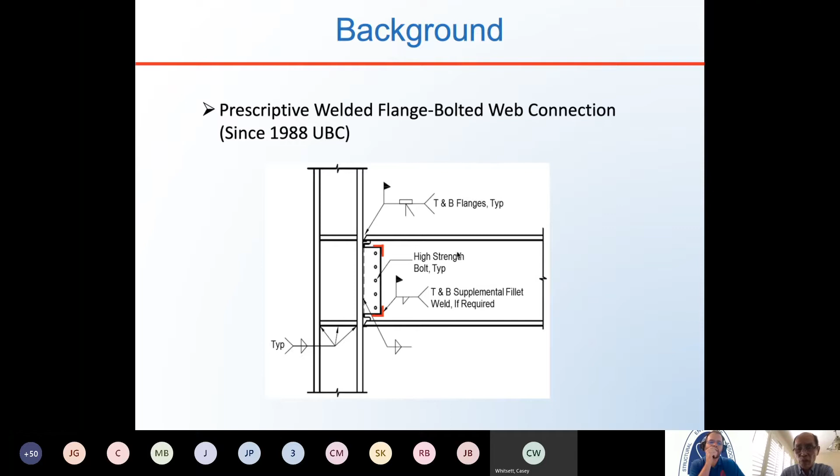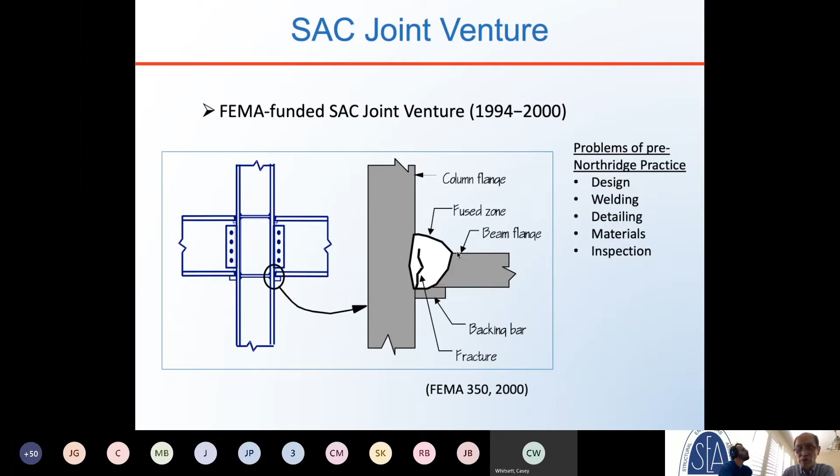The background of this document all started from the Northridge earthquake. In the old days, we used this kind of connection, the bolted web, welded flange, that was codified in 1988 UBC. We know the problem that we saw in the Northridge earthquake—because of that event, there was 5-6 years of research done by the SAC joint venture that we old-timers are very aware of. The problem was pretty widespread: a design issue, welding issue, detailing issue, everything. It's very hard to pinpoint who is responsible for the brittle fracture observed from that earthquake.

So in that joint venture, there are many issues that have been addressed.

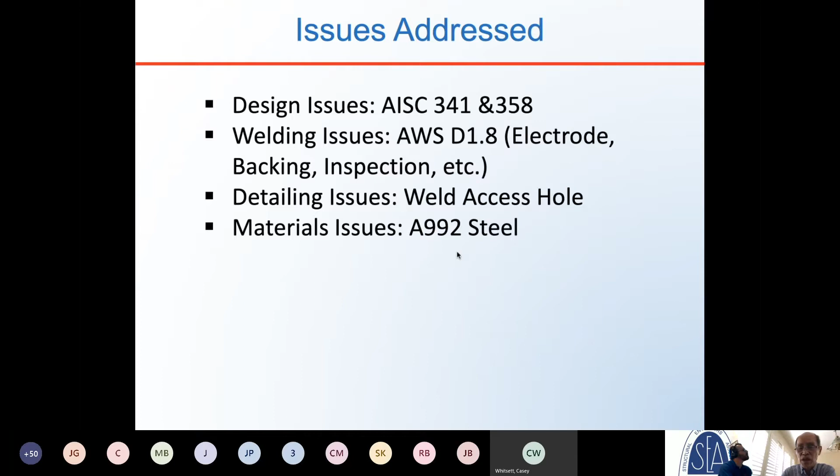As a result of that 5 years research, we have a new material, A992 steel, and the welding code AWS D1.8 to address seismic issues, not to mention the detailing and design issues that you, the design engineers, have to deal with all the time.

So after SAC, we then have the AISC. During that transition period, we also transitioned from UBC to IBC, ASCE 7, and other than using UBC, we also have AISC 341 for seismic design of steel structures.

For that 2005 edition, for the special moment frame design, the moment connections, there's a performance criteria described there. You want to make sure the connection you use will have a deformation capacity up to 4% story drift angle, while the strength cannot degrade below 80% of the beam plastic moment at the face of the column.

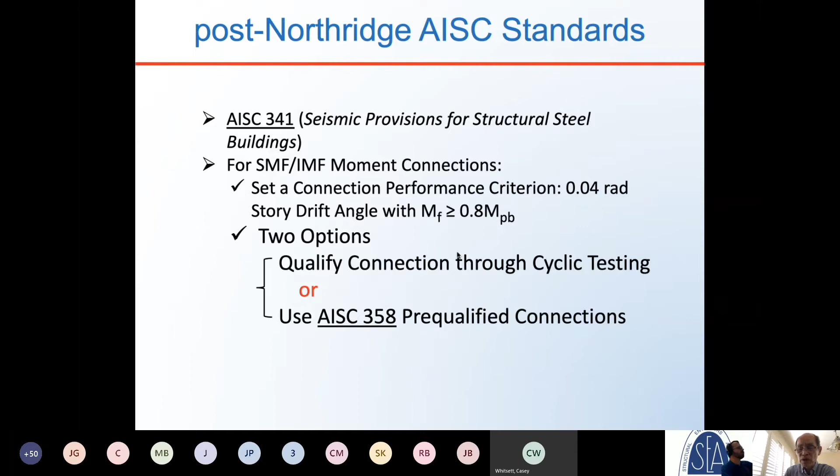341 then continues to say that you, the engineer, has two options: you either ask your client to give you money to do testing to justify your connection, or you use AISC 358 for the connections that are qualified there.

358 is developed by a panel we call the CPRP. The current chair is Professor Michael Engelhardt, Vice Chair Brent Manning from Schuff Steel. If you have any question, you can contact them, or Margaret, who is the Secretary of CPRP now. Their job is to develop this document and to qualify connections for this standard.

That's how they started immediately after the Northridge earthquake. Can we tweak the existing UBC connection by changing the detail or by using better electrode? Can we do a better job? So there's a so-called unreinforced connection. They try different kinds of things.

And they also tried the reinforced connection. For example, the cover plate was tried early on, while they try to figure out the solution we call the reinforced connection.

Then we realize strengthening it may not be the only way. So we also try the reduced beam section, and there are other types of connections. So they digest and then go to the next page.

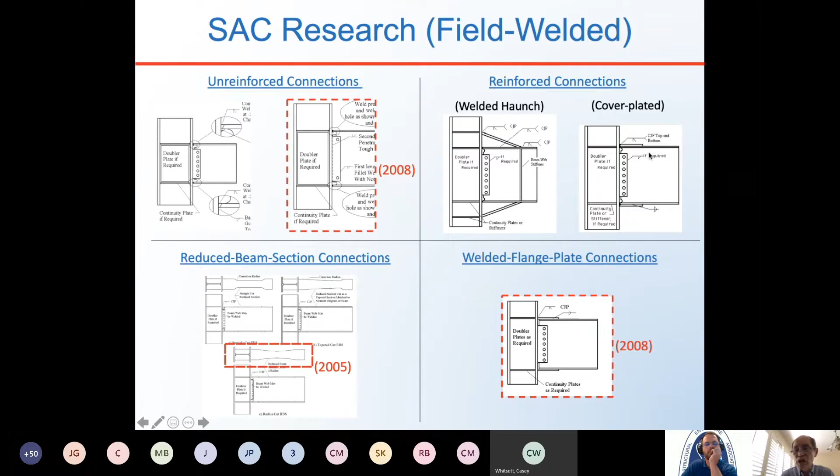And there's a flange plate that, again, some connections have been incorporated. This is out, cover plate is out. The haunch is not included in the 358.

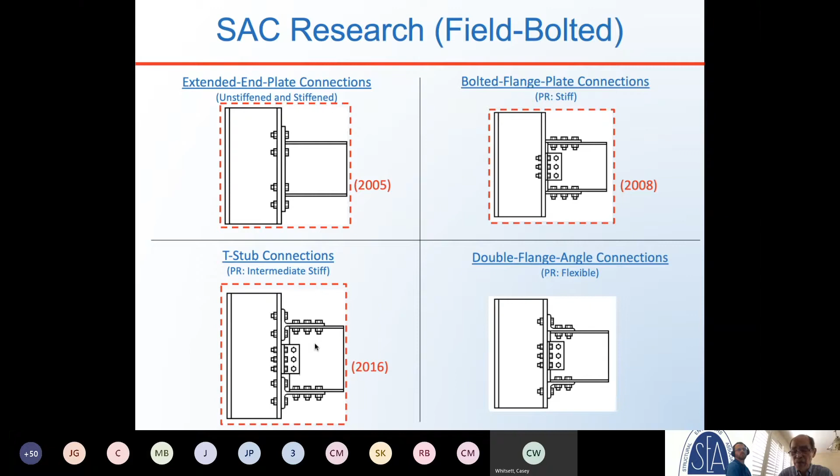And similar for the bolted one - this was incorporated in 2005. I will mention more later on. 2008, 2016, you see, this one takes a long time for the CPRP to digest for inclusion in the 358. And this one probably will not show up.

The history: first edition 2005. Supplement 1, 2008 - at that time there were only 2 connections pre-qualified, after they filtered the connections from the SAC report. Then they added 3 more years later.

Then came the 2010 edition - it was 5, then supplement 1, 1 more, and supplement 2, another 1. So we have 7 now.

The 2016 edition, the one that you use now, 2 added making 9. Supplement 1, another 1 in. And end of July, you should see this, and I will also touch upon briefly.

This is what we have. CPRP continues to work on the 2022 edition, so they will have a few more connections to come. That is the history of 358.

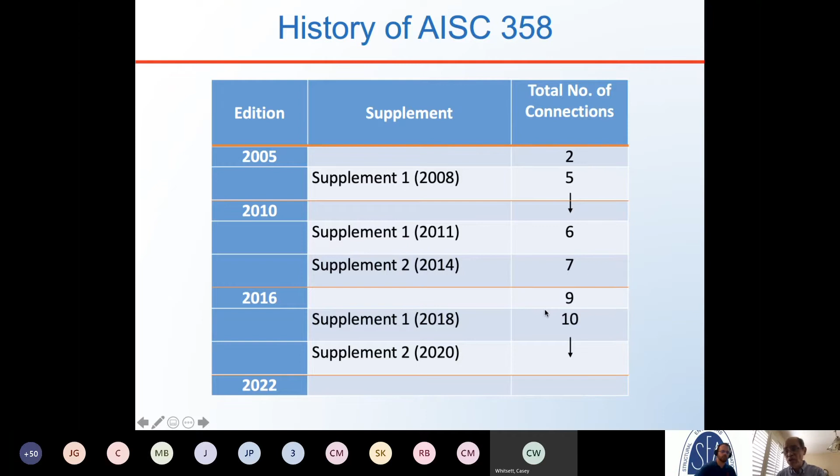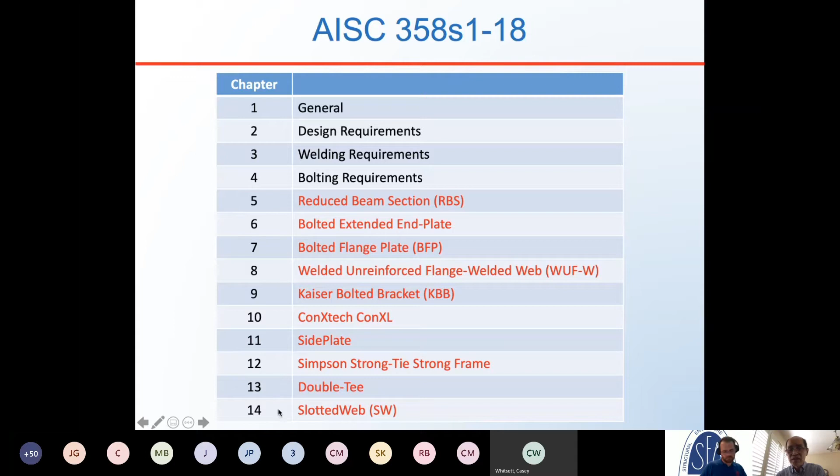So this is Supplement 1 that you have now in 2018. There are 14 chapters: some general requirements, design, welding or bolting requirements. Here are the pre-qualified connections - we have a total of 10 so far. I'll talk about them in a moment. You might ask, why do you need 3 or 4 hours for me to talk about 358? Because I think if you have a general idea of this document, you should be able to figure out whatever connection you want to try. So my presentation today is to provide a general picture of this document.

I will take one particular chapter, RBS, which probably all of us are familiar with. I'll use that as an example. This is the outline of that chapter. Every connection chapter is outlined in a similar manner. The first part is the preamble, which tells you what this is and where the structural systems you want to use are. That's the preamble - some general description of how it looks.

Then I group this as Part 1: qualification limits - the beam-column limitation, I will talk about that. That is true for every connection - you always see the limit. You want to see whether that connection will be good for you, so you look at that.

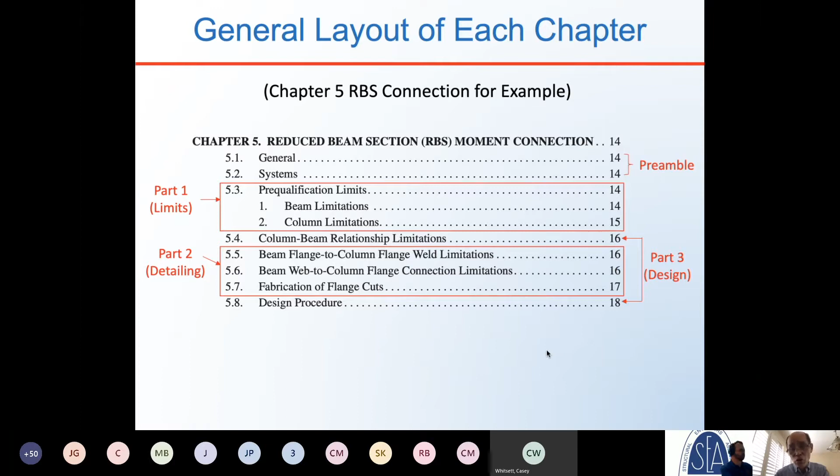If you're familiar with chapter 5 and you want to look at another connection like WUF-W, you go there. It's probably not hard. Now let me, rather than talking about one connection at a time, give you an overview of what you have.

Some engineers told me, saying, I need to know more about 358 because my design office only uses RBS, and there are so many other connections in this big document - I really don't know, I need your help. So here I try to summarize for you, an easy to understand figure.

The first one is the beam depth. Beam size is very important for moment connection performance. The reason why we had weld fracture, CJP weld fracture in the Northridge earthquake is because the beam tried to form a plastic hinge, tried to develop plastic moment. It put a tremendous amount of load on the CJP weld. So the weld force demand is coming from the beam - that's why beam size is very important.

There's another thing many of us know: there is a beam size effect. That means if I use a small beam for testing to qualify a connection, I cannot generalize that to a deeper beam. That is one lesson we learned from the Northridge earthquake. In the old days, we tested W18 beams, then engineers used that for W36, and there was a problem.

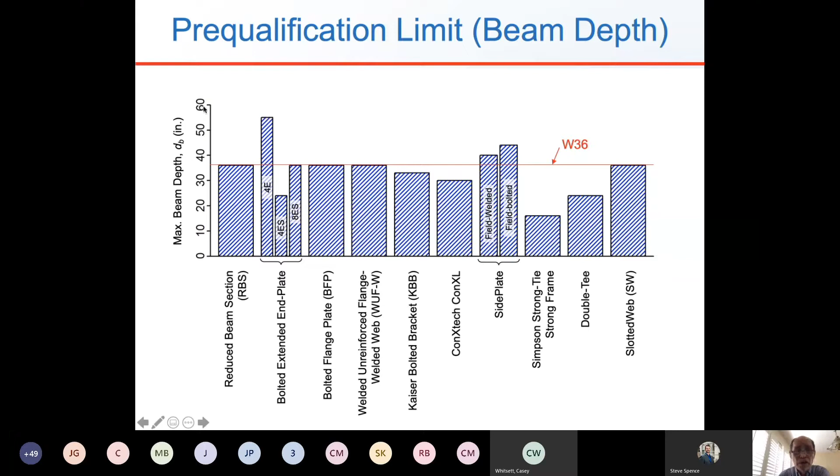But this one stands out - actually this can go to 55 inches in depth. You say, there's no such rolled shape - yes, that is mainly for built-up sections. I'll talk more about that. So beam weight is also important - the heavier the beam, the larger the size, the heavier the beam will be.

Look at this bolted end plate. It's built up, for metal building. You can see it's very, very light. Even though you see the 55 inches deep, actually it's a very light member. This is a very different animal. Unless you are in the metal building industry, usually you don't see this connection.

Now look at the beam weight. I use RBS, the well-known one, as a reference. It can go to 300 pounds - they are pretty light. So in case you want to use a heavy beam, probably they may not help you too much, so you may have to resort to some proprietary connection. Side plate can go beyond what the 300 pound can do, so you can see that they provide a much heavier beam for you.

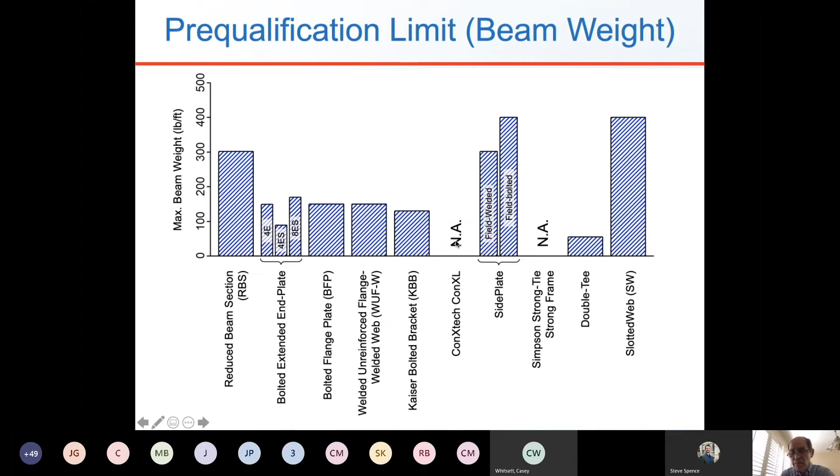And the other one is the slotted web, it's also on the heavy side. Those are very light duty ones. Here they are not available because they're tabulated somehow, so it's not unlike the other one, they put a number. That's the reason why that is implicitly limited by some other means - for example, in the tables.

Another limit is the beam flange thickness. Just imagine you have a roll shape, the flange width is 12 inches, and the beam flange is pulling your CJP weld. So of course the amount of force that the beam flange is pulling on that CJP weld is also a function of thickness. So thickness also plays an important role.

Look at RBS, 1 3/4 inch - so you get the feeling, huh? 1 3/4 inch, others are thin. And this is for metal building, you see it's very thin. Usually it's a build-up member, so it's pretty thin. So that is regarding the beam flange thickness, and sometimes there's no limit for some connections.

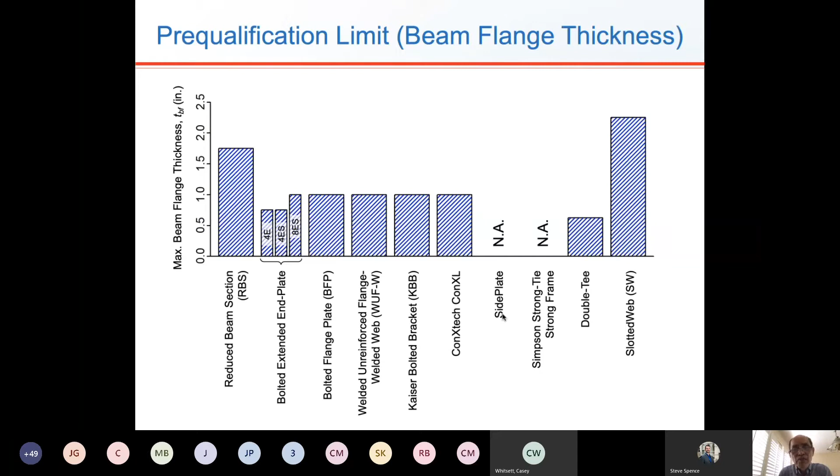So you, the designer, you like to see - you like the previous slide - you like it to be as large as possible so you can use a larger beam. So maximum, we always say maximum depth or maximum flange thickness. Now there's another one, it's not the maximum, it's called the minimum.

For each connection it also tells you, this is the one, you cannot go below this, right? For the beam depth, you cannot go beyond that. But for this ratio, you cannot go below this.

Why? Just imagine you have a beam. If you develop plastic hinges at both ends, you draw the moment diagram - there's a reverse curvature, right? So the slope of the moment diagram is shear. If that beam is shorter, while you develop plastic moment at both ends, of course the slope is larger - that means shear is larger, so that means the connection will see a larger shear force.

What does it mean to you as a designer? If I, in the laboratory, test a moment connection for a span of 30 feet, I qualify the connection. You should not use that blindly for your structure with a 20 foot span, because the connection will see a much larger shear. That's the reason why there's a limit.

This is the clear span, LC, clear span with respect to the beam depth. Again, use RBS as a reference line, around 7. So in this case, probably the lower the better, right? Because I say minimum, so the higher - that means your span relatively cannot be too short. So the smaller, the better.

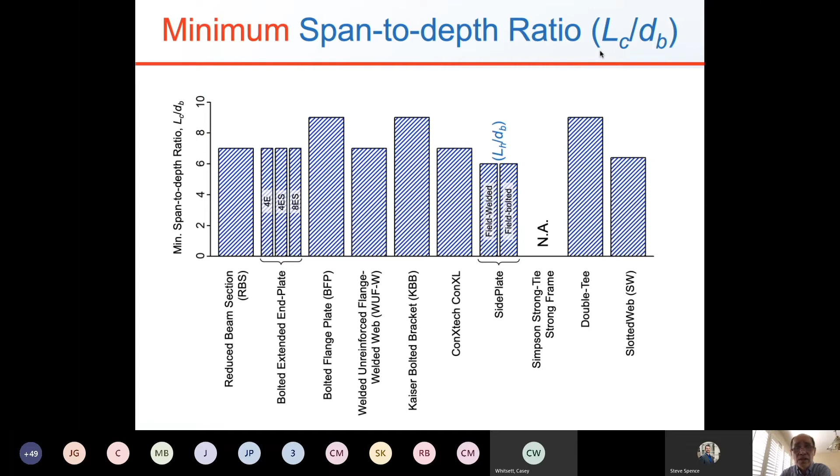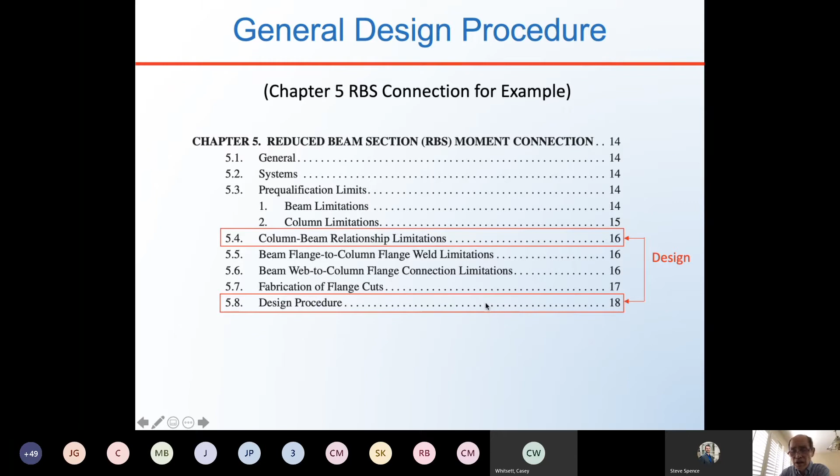Now let's touch upon briefly the design procedure that you are all very familiar with. I want to go over this quickly, and I say you don't need me to give you 3 or 4 hours of a short course to talk about how to design every connection. The concept is the same for every connection. It's the same. Okay, this is the frame, we want to define plastic hinges.

And I will talk about the location of the plastic hinge later on. You know the plastic hinge. Of course, you follow AISC, you have the seismic load combination with overstrength because we're doing capacity design. So I take one beam out - this is one beam out. Once you know the plastic hinge, then we try to find out what is the maximum probable moment. We want to find out what it is. You know how to do that for RBS. We find out this, and then for the seismic moment, this is a straight line.

It's a straight line, then I extrapolate the moment to the column. That becomes a demand for me to check strong column weak beam, panel zone, and the requirement for continuity plate. So I just extrapolate. This is the Emh per ASCE 7.

This concept is so simple. All you need to know is where's the hinge for the connection you are using and how to compute these. That's it. Then everything else stays the same. It's the same design philosophy.

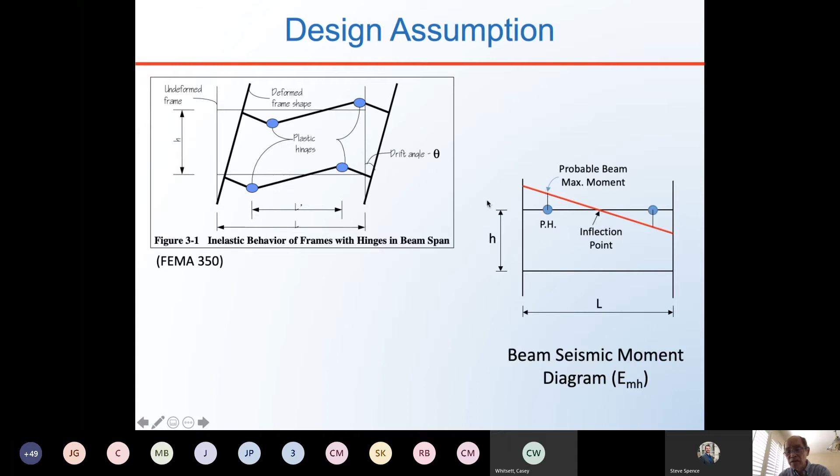How come I cannot move?

Okay, RBS, right? RBS, half of the beam span, center line. You all know this. Inflection point, we assume it at beam mid-span. So plastic hinge, SH is in the middle of this RBS. So I compute this. Of course, here I have a reduced section. I use ZRBS, and here for A992 steel, 1.15.

Okay, then you extrapolate to the moment there. You extrapolate for the panel zone shear check and the continuity plate check. You extrapolate to there for the strong column weak beam check. This is seismic moment. You just add that to the gravity load component, which is not hard at all.

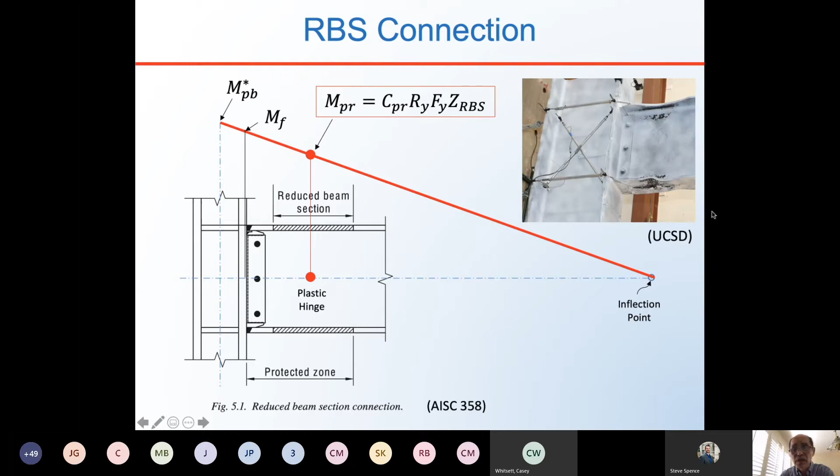RBS, okay, this is a testing we did. You can see that is a plastic hinge, which is reasonable.

But in document 358, in that particular chapter, it tells you where's the plastic hinge. It's here. It's described in that chapter. So use that one, then you compute the moment.

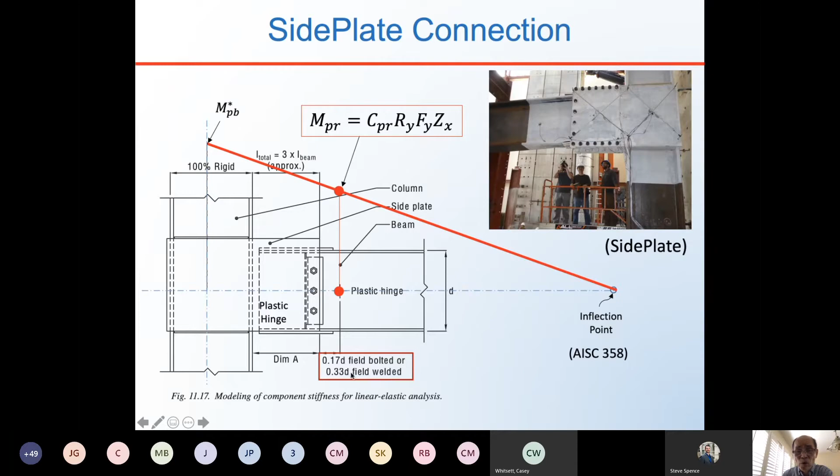Of course, here you don't use RBS because side plate beam does not use RBS. So you use the complete ZX of the beam. Then you do extrapolation. It's the same thing, right? So that is, you can see the hinge is around there, which is compatible to what is proposed by side plate and used in their design.

Okay, so good. Let's go over one connection at a time. Okay, one at a time.

Chapter 5, RBS, the first one introduced. One of the first two connections prequalified. This is the one that you use quite often.

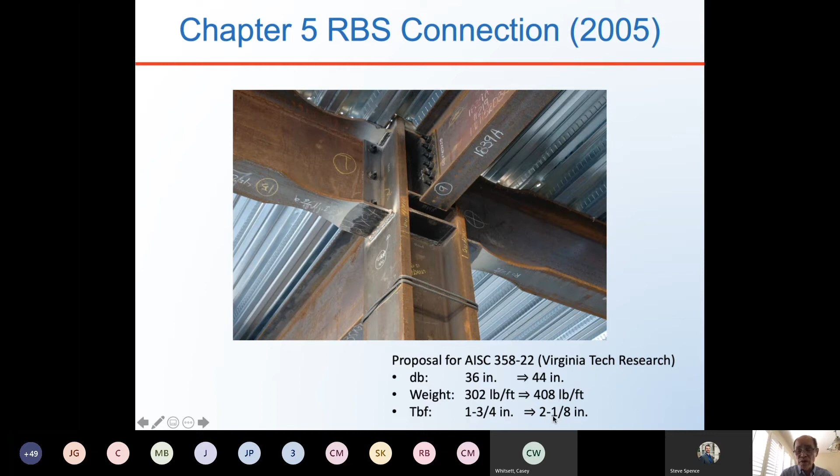Recently, there's a proposal for the 22 edition based on some testing at Virginia Tech. The first ballot has been passed, I believe, by the CPRP. The proposal is to extend the beam depth to 44 inches. The weight will go to 400 pounds. And the thickness of the flange is also increased. Just be aware of that. That is likely to be incorporated in the 22 edition.

That is chapter 5 on RBS. Chapter 6 is extended end plate connection. As I mentioned, it's mainly used for built-up members, and the metal building industry uses that a lot. This is the 4-bolt, but it is stiffened, and this is an 8-bolt.

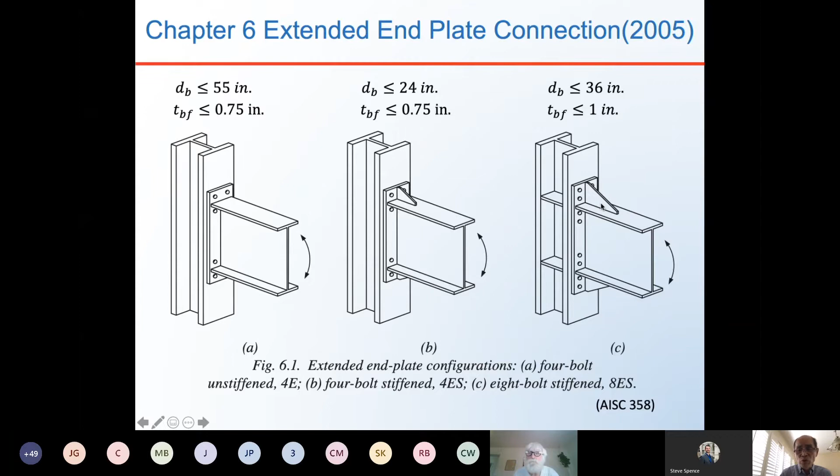So those are prequalified. Recent effort at Virginia Tech also tried to develop a 12-bolt, but not successful. So they're still trying to figure out how to make that work. They tried to have that included in supplement 2 to be released this year, but they encountered some difficulty. So this one has not been successful. And this is the type of connection.

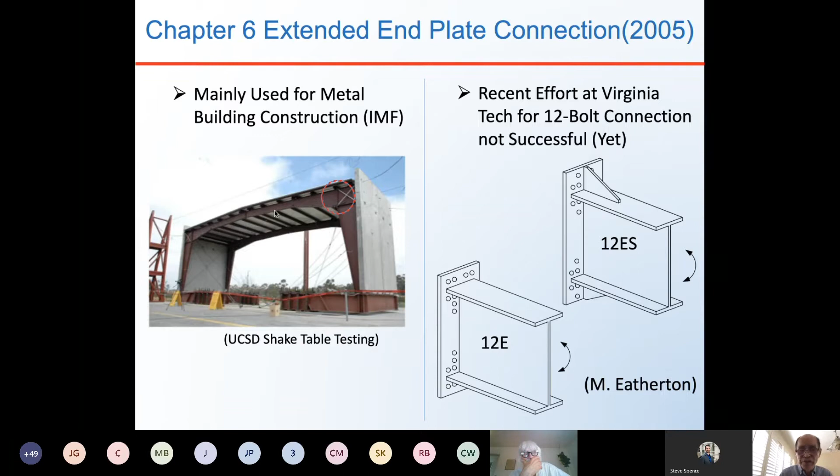Okay, I happen to have some experience with one of the shaking table testing of the metal building that I tested about almost 10 years ago. They use this kind of connection for IMF in high seismic regions.

Whenever bolts are in shear, you should expect noise, pretty loud noise, okay, which is pretty typical. This is the first connection test I did with the bolted connection that has a lot of noise because they are pretension bolts and they will slip.

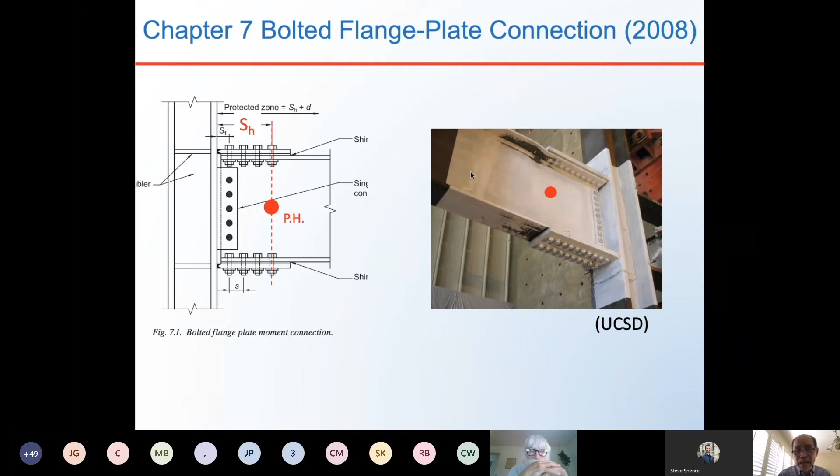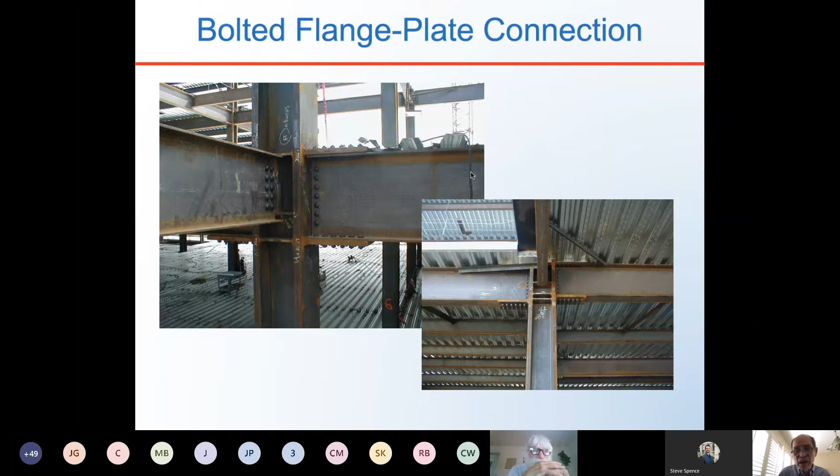I don't see too many applications of a bolted flange plate connection. This is one that I'm aware of. Somebody can provide a photo to me. This may be on UCSD campus.

Okay, but other than that, I have not seen this type of construction. Go to next one, WUF-W. It's more commonly used. This one is closer to the pre-Northridge. But the one problem with pre-Northridge is, among many issues, the web is bolted.

So for the WUF-W, with all the improvements, remove steel backing and those kind of things, there's an enlarged shear tab, and that needs to be welded. And the beam web also needs to be CJP welded. In addition, there's a special enlarged weld access hole that is in D1.8. That weld access hole needs to be used.

And there's a special reason to have this weld access hole. Because making this longer, one problem with the pre-Northridge is we've put a lot of bolts to resist shear. But in reality, bolt web is not very effective.

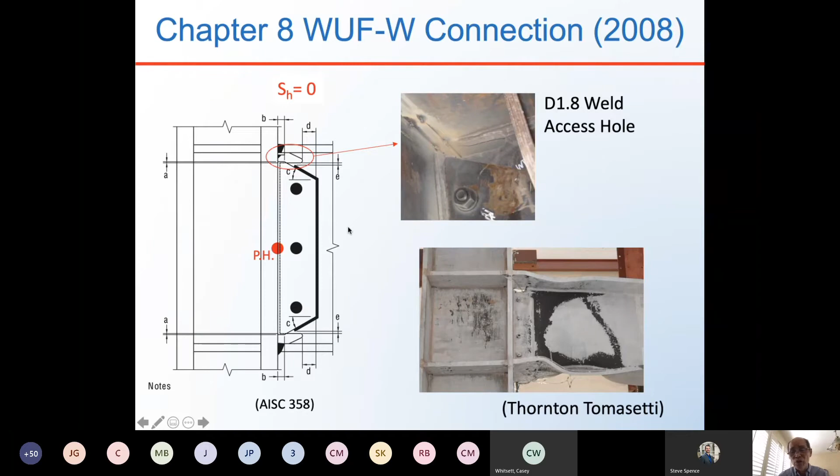That is WUF-W. This is one application, WUF-W, from one company in Pasadena. WUF-W. This is another one from one of my former students who showed me this photo. This is for a bigger building, this is for one story, for a police station. So you can see that it remains to be welded. Keep in mind that the weld access hole is very, very important.

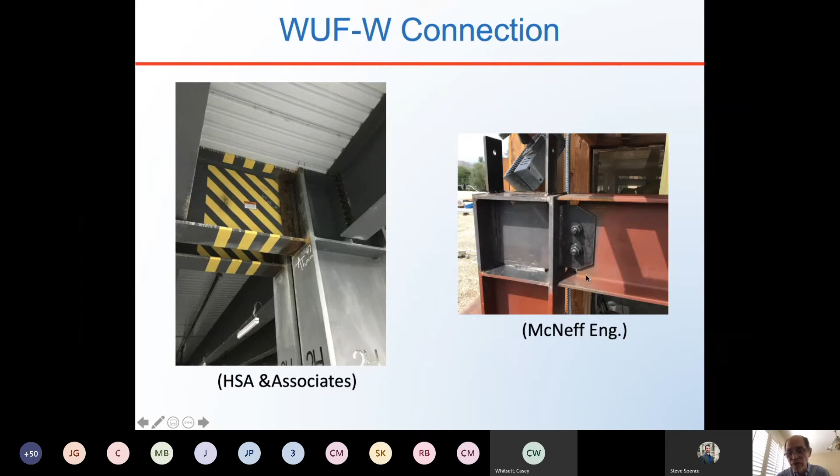Weld access hole. Since I'm talking about the beam shear, let me jump to the last chapter because it's relevant to what I just described about the WUF-W. So let me jump to the last chapter, the slotted web that was introduced in 2018.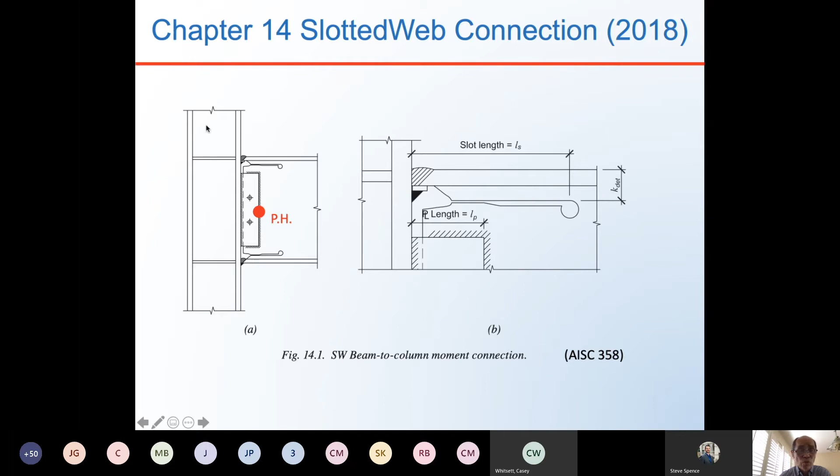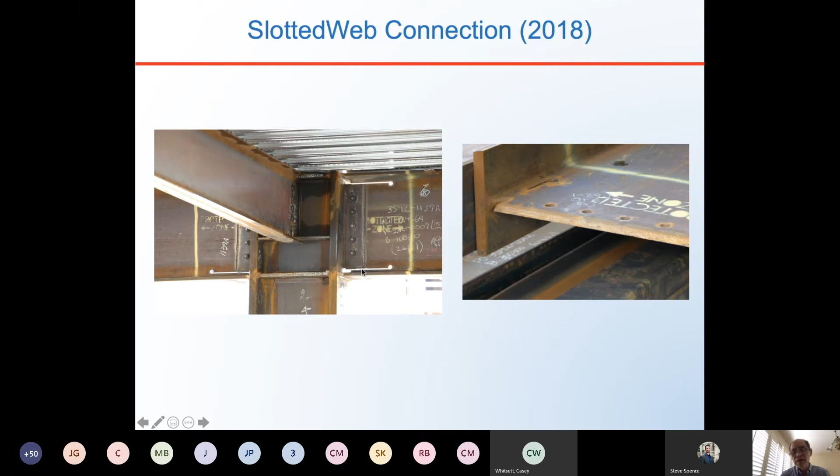I suspect once they welded that one, then they flame cut this portion to create this. This is a little, the edge is a little rough, but it's okay. I think it's not as critical as RBS. The smoothness is very important.

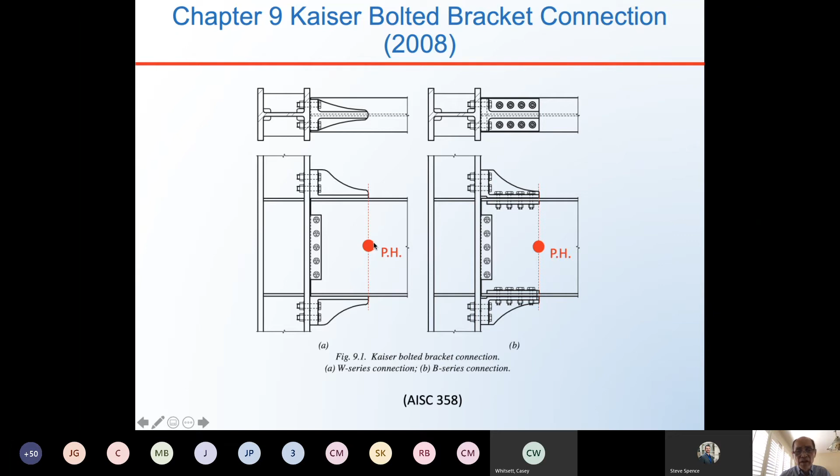Chapter 9, Kaiser bolted bracket. There's a welded version and a bolted version. I don't see a real construction in San Diego. The plastic hinge is assumed to be here in design.

I have two experiences with the Kaiser bolted bracket in the lab. This was when I was working with a technical engineer on the retrofit of a Caltrans district office in Oakland. This was one of the options they contemplated, but eventually they did not use it.

This is good for retrofit. You just imagine, of course, you have to drill a hole to the flange of the beam and the column, but no field welding in an existing building. Fire hazard is a concern, so this is attractive from that point of view.

This is the detail, you can see the connection detail. Another project I was involved with was for a police station, again in the Bay Area. They also used the bolted bracket.

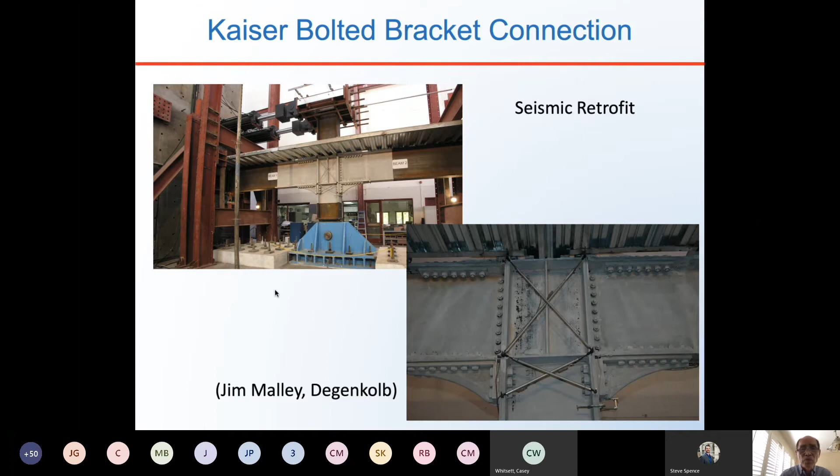Compared to the other connection, there are two aspects I can think of. First, it's biaxial. Most SMF designs are 2D frames, not 3D, but this is a true 3D frame. Second, it uses a 16-inch HSS, and the concrete can be filled to further increase the stiffness and strength of the connection.

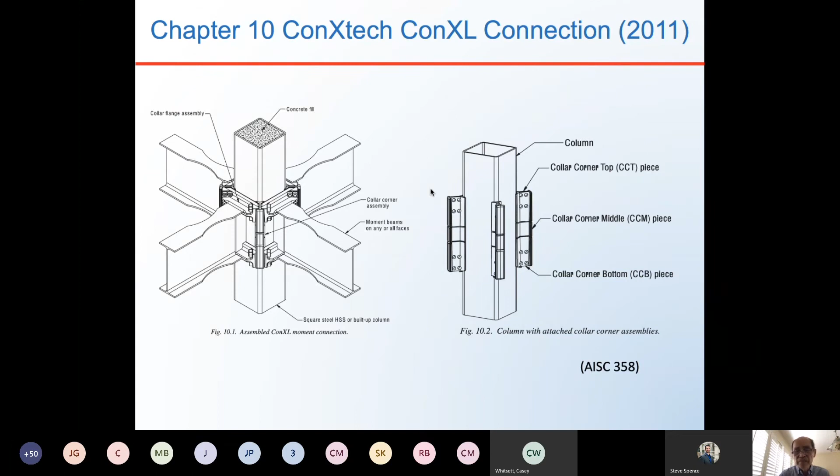I happened to see one building under construction last year near the junction of 163 and 52. I don't know who the designer is, but I happened to see it, so with permission I got in and took a few photos. This is what the connection looks like.

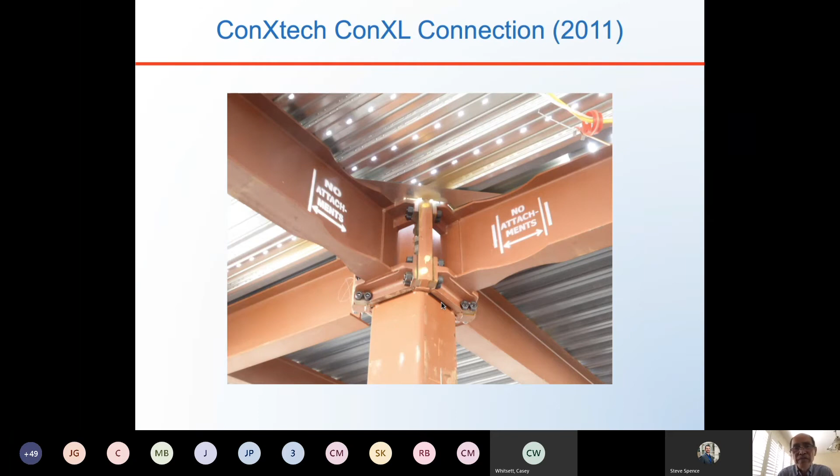That was introduced in 2011. Chapter 11 is the side plate connection. It was introduced relatively late, six years ago, but the side plate connection might be the first proprietary connection.

I started doing testing for the founder, David Houghton, in December 1994. I still remember, it was a very cold day. We were doing testing for them.

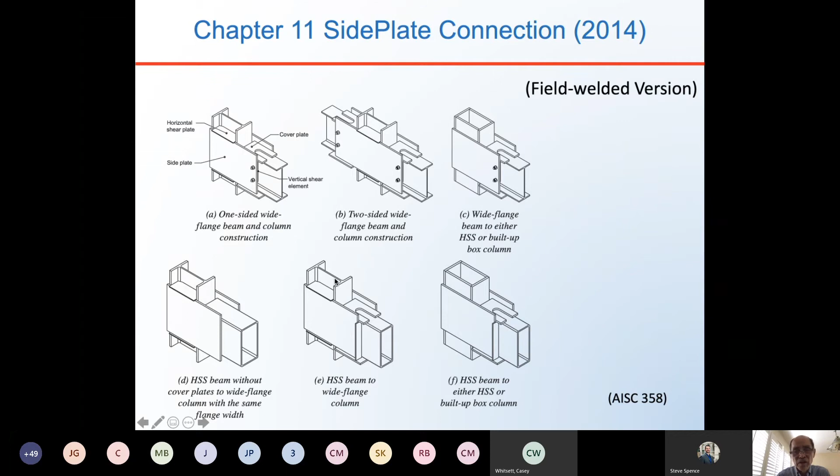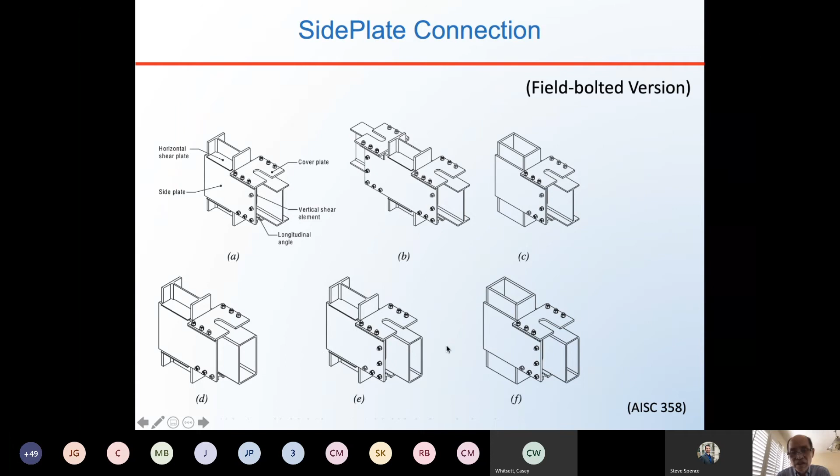And then a few years ago, they started the field-bolted version, so you see here. Of all the connections I tested for side plate, the beams are always rolled shape or built-up. Their connections are also qualified for HSS, which were tested elsewhere, not at UCSD.

They also, over the past 20 years, have conducted several biaxial moment connection tests at UCSD. They started out with this dual strong-axis connection, with the W shape and the structural T cruciform, like this one. This is the biaxial connection.

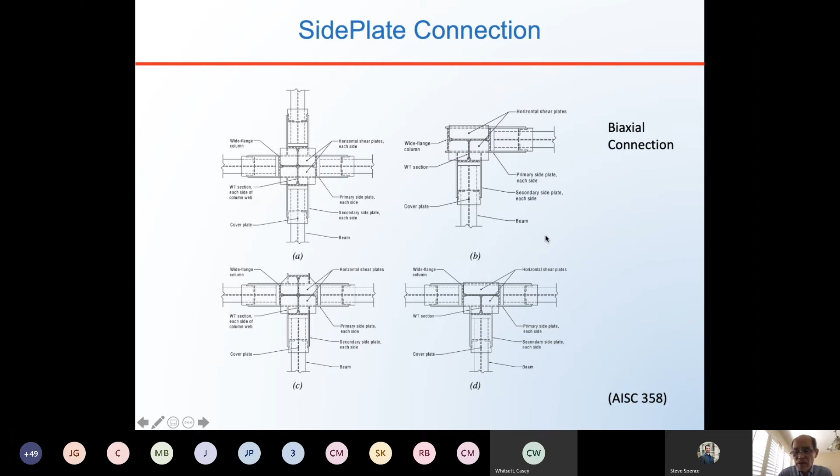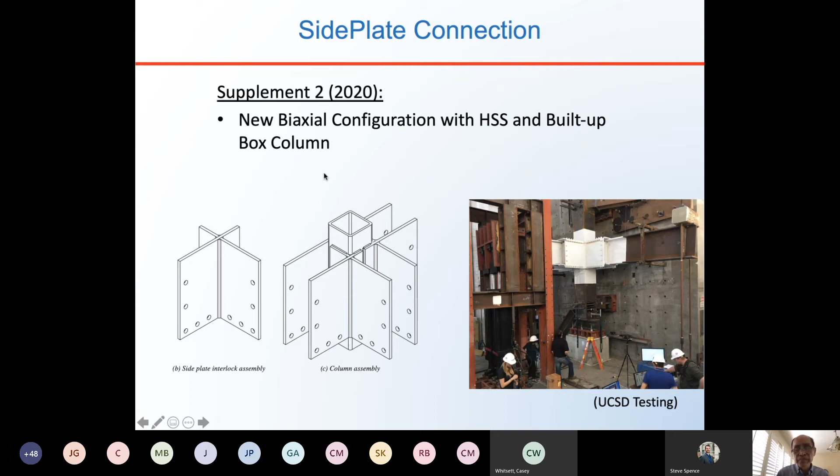They have also pre-qualified that one. In Supplement 2, likely to be released by the end of next month, they also pre-qualify the HSS or built-up box columns. This is the built-up box column testing that we did for them about two or three years ago, so that is another addition.

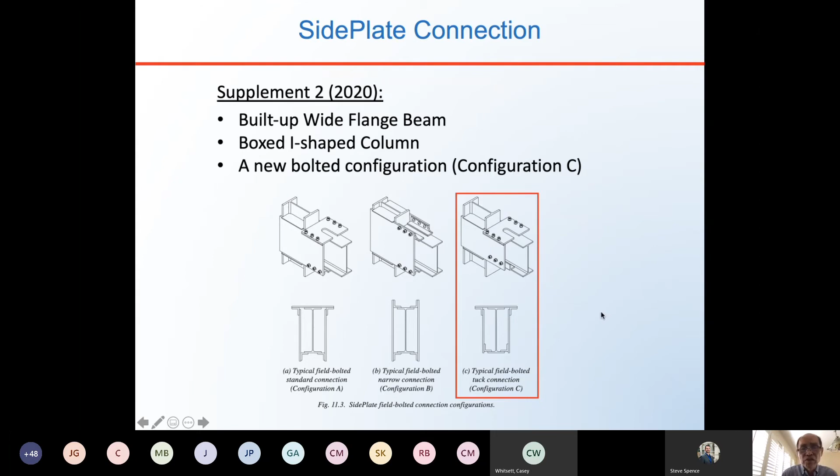In Supplement 2, just to keep you updated, there are many choices you can have. Another one they introduced is so-called Configuration C. In the original configuration, the angle points down, now it points this way. My understanding is it's mainly for hospital applications. So those are the new features to be added.

Let's go to chapter 12, Simpson Strong-Tie, which is also a latecomer, introduced in 2016. This connection is interesting—it's a PR connection, not an FR, fully restrained connection. It's a PR connection, that's one thing to be noted.

The idea with most connections is we rely on beam hinging. That means after the earthquake, the beam will be damaged in a nice way, so to speak—though we don't want brittle fracture, that's what we expect to see.

For this connection, they want the beam to remain elastic, and then they put in a fuse. It's a structural T there, can you imagine that? This is a fuse, they want that to yield.

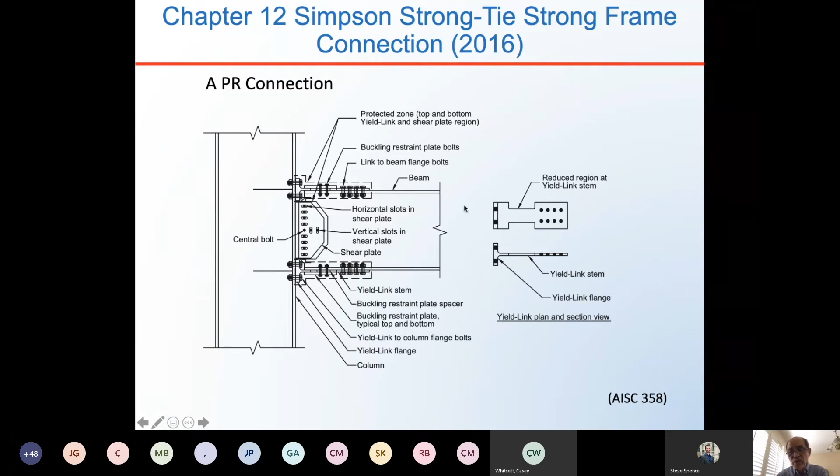And there's a buckling restraint plate on top of it. This is a better view. They want this just like the tensile coupon—they want it to yield in tension and compression.

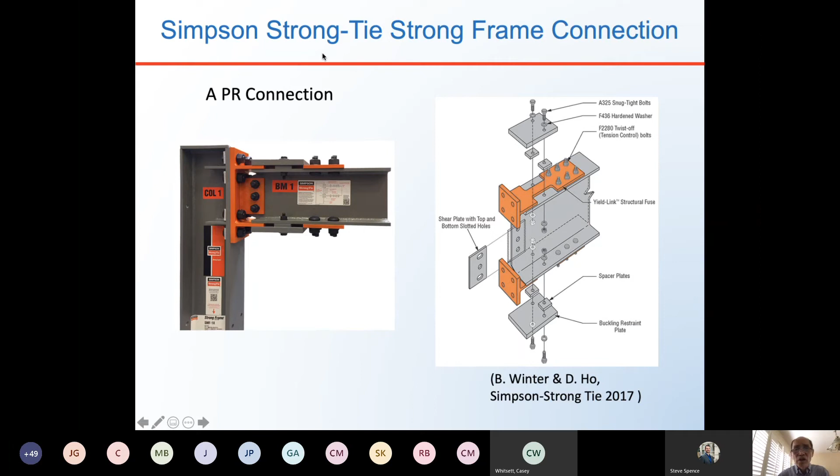Do you see that plate in orange color? The middle portion that you don't see is the narrow portion that will yield, but in compression it will buckle. So just like the BRB, they put a plate to prevent it from buckling. That is the basic idea of this, the strong frame connection.

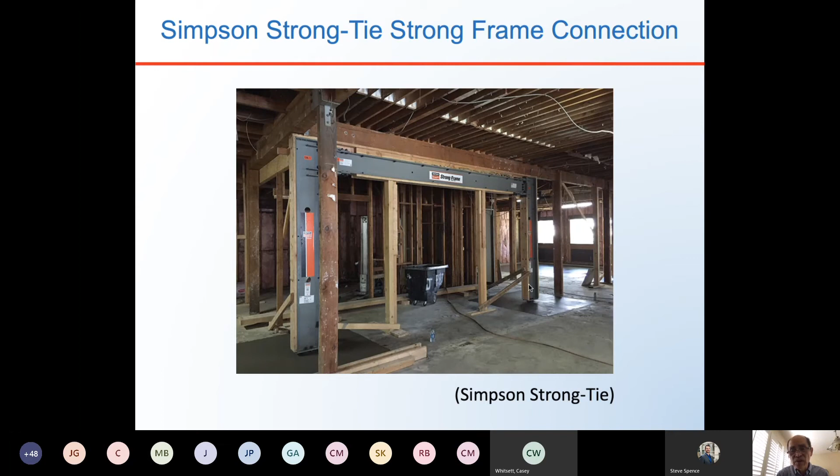Their application seems to be more for residential, 1-story, 2, 3-story, for light framing construction, it appears. That is the original intent of their connection.

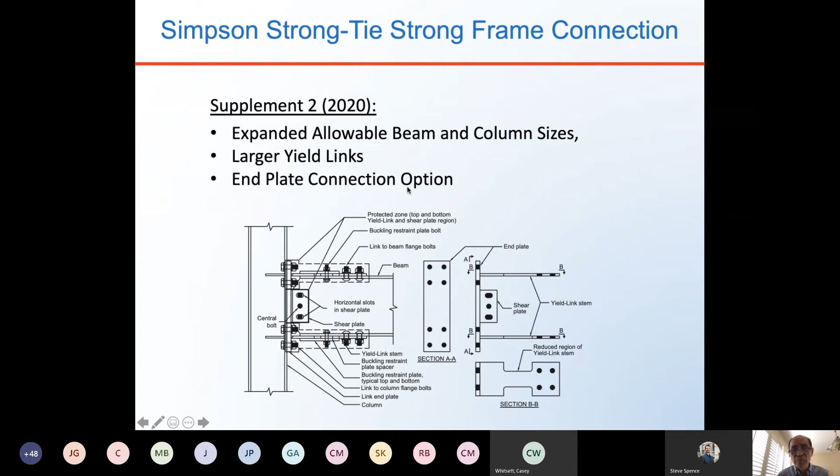So this one in supplement 2, they have expanded the beam and the column sizes. Now they are targeting more heavy-duty members, and the yield link can be larger. They also provide some option other than using the T. They use that so-called end plate option that will be introduced in supplement number 2.

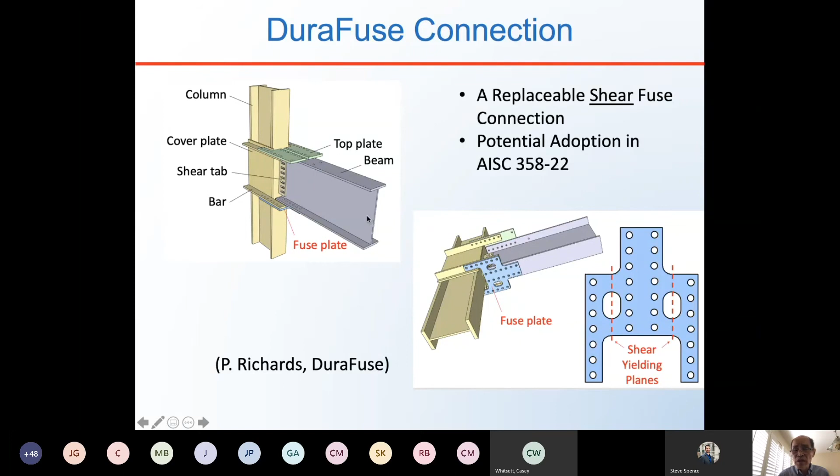It's called the fuse plate. This is the bottom flange. It's a fuse plate, you can see that one. The beam flange force has to be transmitted to here through this cross section. So the idea is to let this portion yield in shear while keeping the beam elastic. That is the idea of this connection.

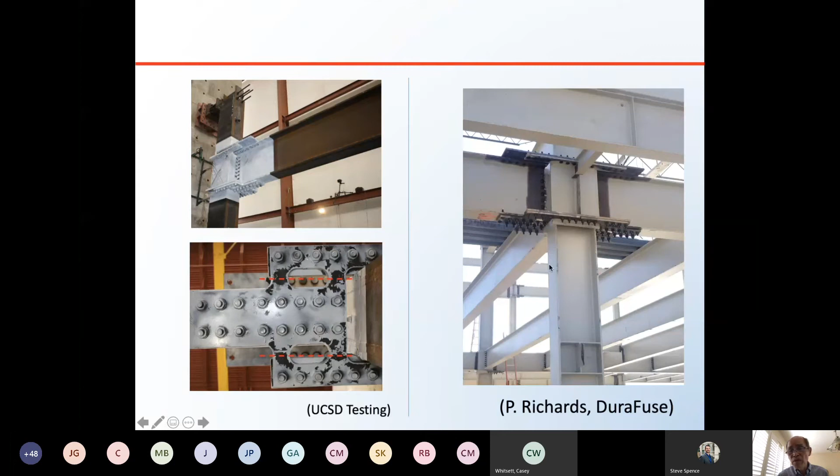This is the testing at UCSD, a year or two ago, and you can see this is the yielding pattern, looking up to the bottom portion of that one. This is one real application.

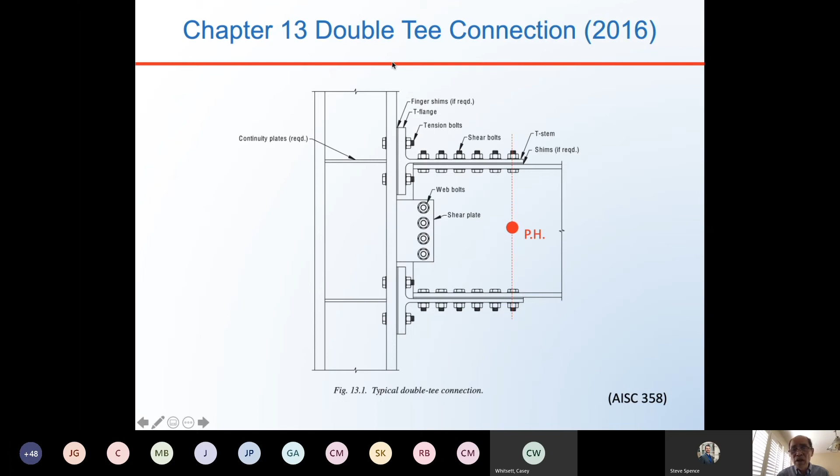13, double T, that is the interesting one, is like this one. Again, bolted connection. Design, we assume a prying force, then we go from there to design this. You look at the T-stem, this is in shear, the bolts are in tension. Both are in tension, in shear. You can imagine this pry action.

What is common of bolted connection? Lots of checks, because there's so many limit states — pry action, lots of checks. That's one observation I made. Whenever you're dealing with bolted connection, so many things you need to check.

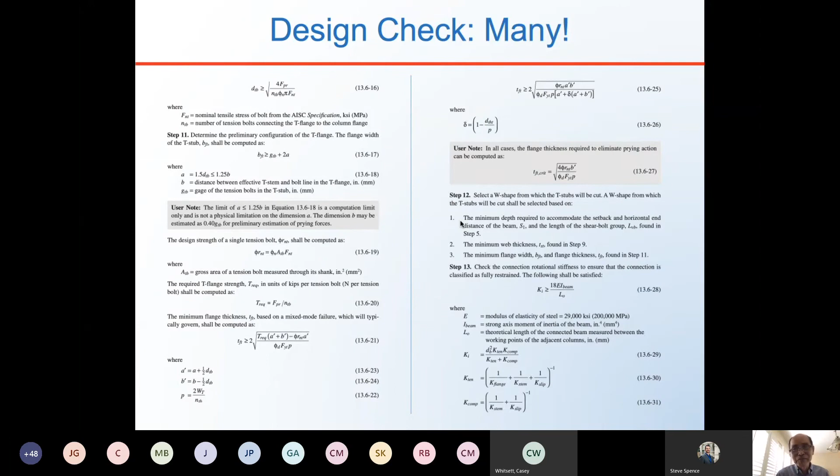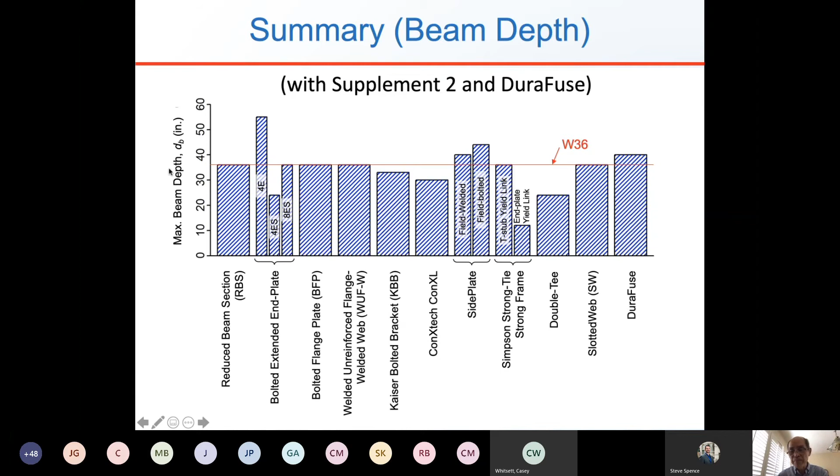To summarize, to conclude my presentation, now I've included supplement 2 and DuraFuse. So you see that you have a wealth of connections that you can choose from in terms of beam depth and in terms of beam weight.

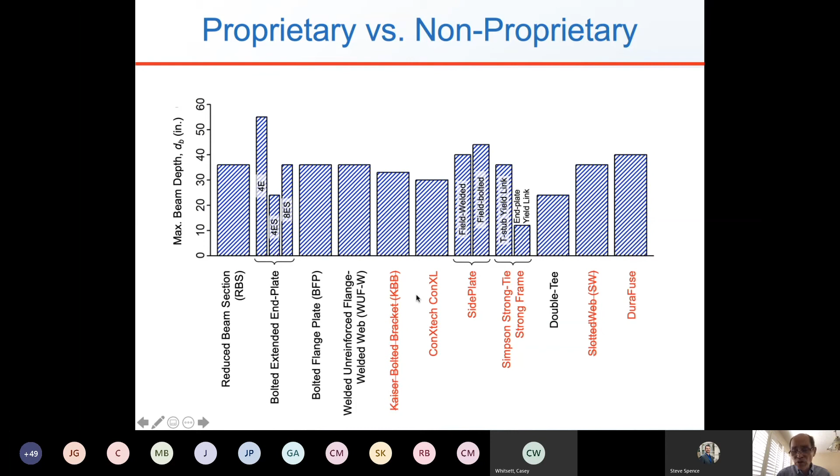Proprietary versus non-proprietary — you can see the ones shown in red are proprietary. This connection, the patent has expired, so in the 2022 edition they will be renamed. For example, it will not be called the Kaiser bolted bracket — it may be called the cast bolted bracket, and those proprietary information will be removed. But there are other proprietary connections that provide you with many options to meet the need you need.

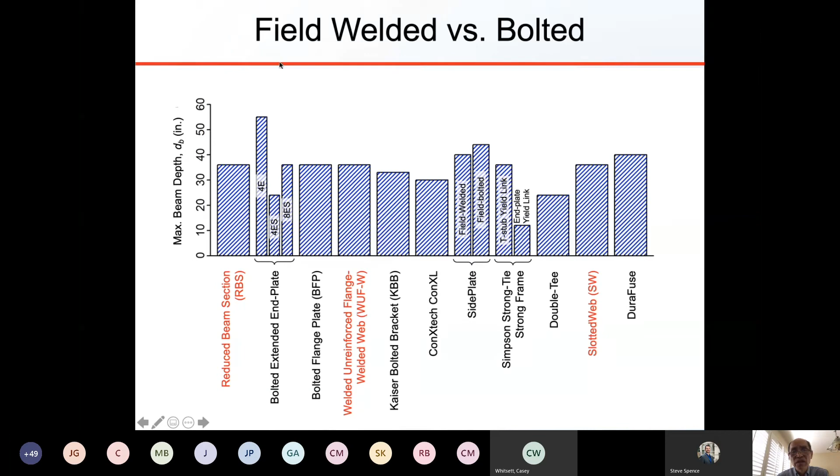Here you also have the option of doing welded or bolted. There are many that are bolted, the red ones are welded, right? RBS, WUF-W, slotted web, side plate can be welded, can be bolted, and there are different kinds of options. So that's another consideration.

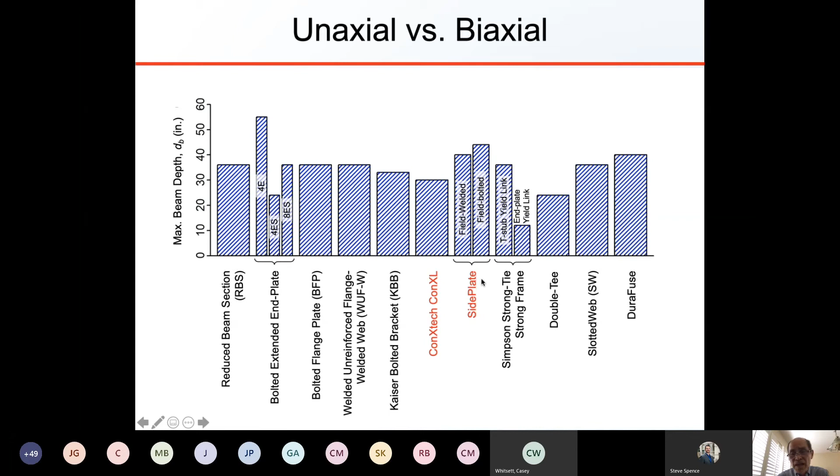Uniaxial, biaxial — most of them are uniaxial, unless you do cruciform column or those kind of things, then you can do biaxial. But these proprietary connections, this is going to be biaxial. And the SidePlate also offers a biaxial version of the moment connection.

With this, I will end my presentation, and I will share this PowerPoint file with you upon your request. I will stop here. If you have any question, please feel free to let me know. Let me make the last comment.

I'm a researcher, so I'm on the other side, not like you, the end user. I share with you what I know about the 358, the test photos, and some photos I collected when I happened to see buildings and go in and take photos. If you have some interesting photos, please share with me because you are the users — I really don't know what kind of connection you are using. With this, I will stop here.